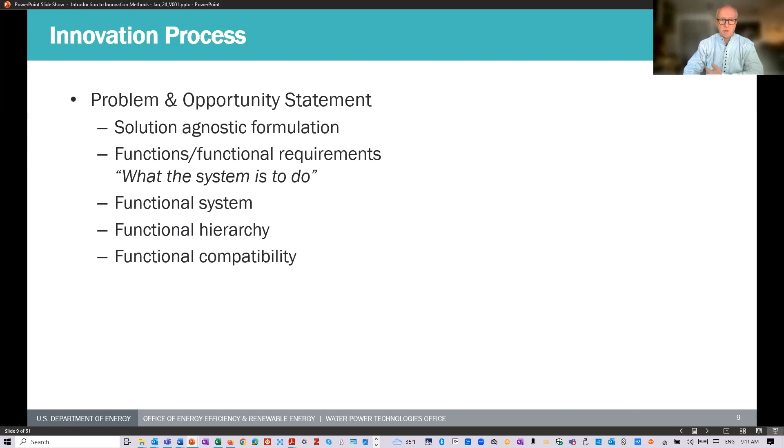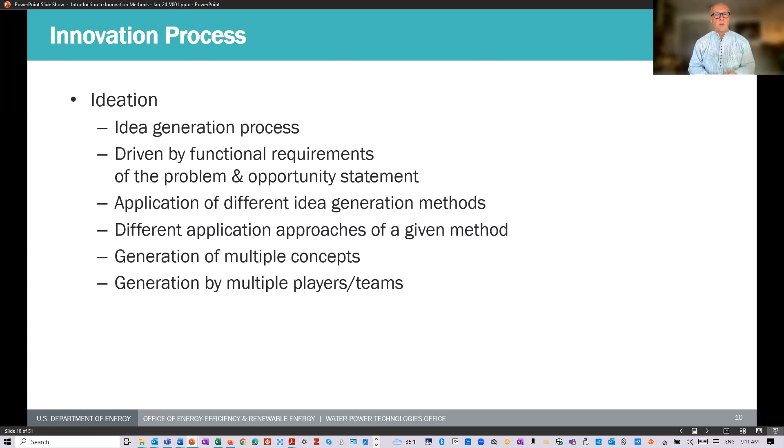Ideation. We want to have the ideation driven by the problem statement in forms of functional requirements. We want to generate more than one idea, have them compete against each other, and iterate through them.

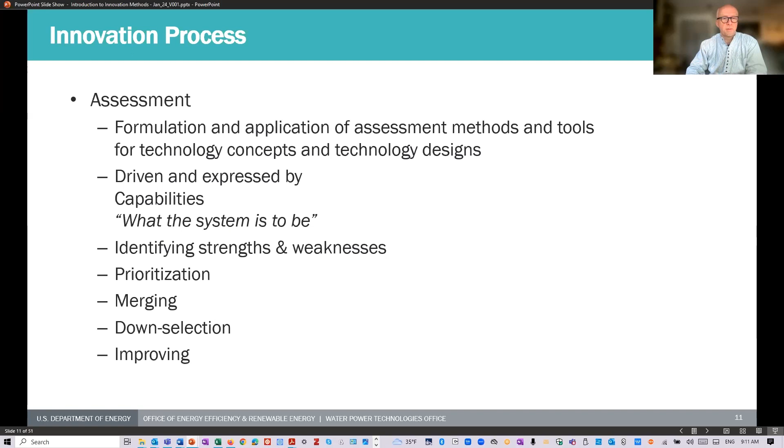In terms of assessment, if we want to iterate and have ideas compete, we need to understand how good they are. This is where we've developed, for our purposes, the TPL assessment, and you have separate webinars on that. We want to identify strengths and weaknesses, and as a consequence, we might prioritize or down-select certain concepts in our own technology development process in general—again, not prize-wise.

Then the development itself is a process in which we strive to improve the quality of a technology, but also to mature it. It's an iteration across different concepts. Okay, just that as a high level.

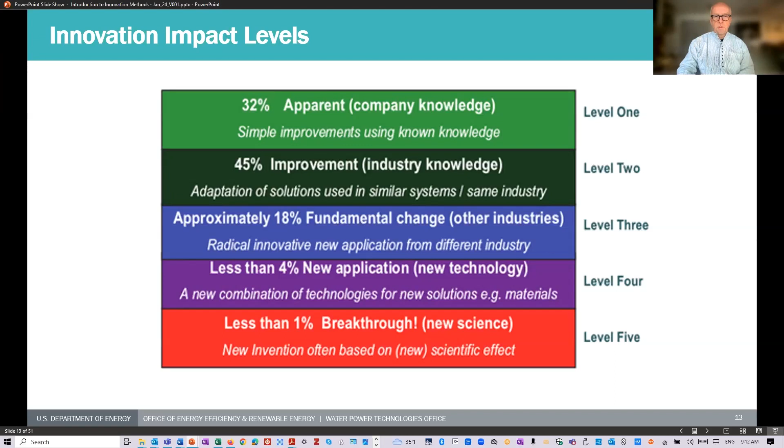So let's go to TRIZ, this technique for inventive problem solving. A bit of background history—you may remember some of this.

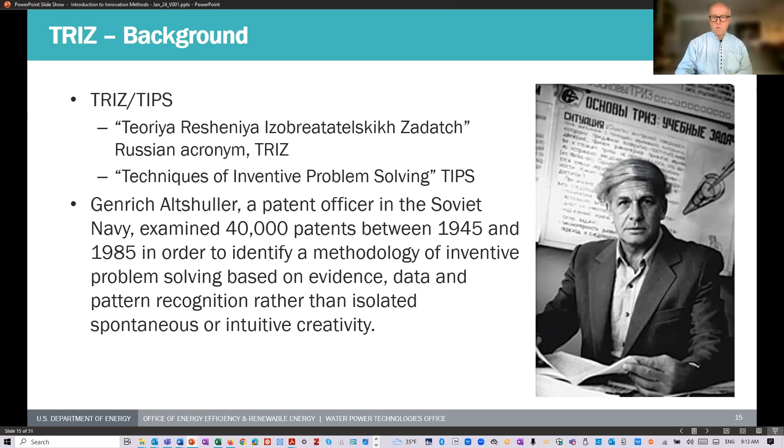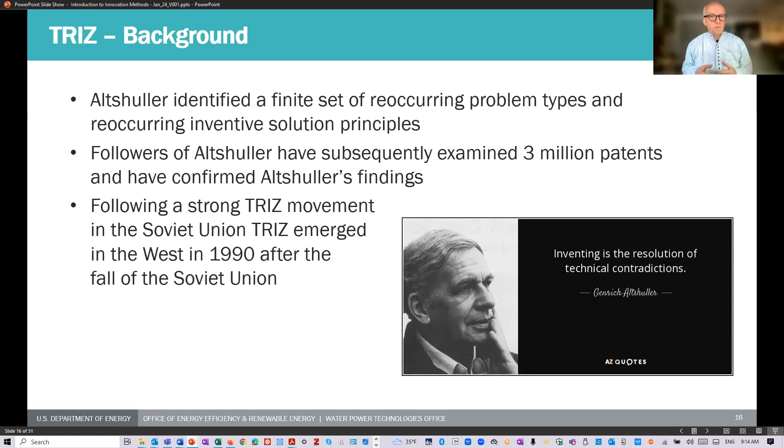He went through a large number of patents, as mentioned previously, and identified the problems encountered in these patents and innovations as contradictions—always solving a contradiction. He identified a finite set of recurring problem types and a finite set of recurring inventive principles. The beautiful thing is that when you go through a lot of innovations and patents and match these, you can say: if I have a certain problem, I know from experience that a certain inventive principle, and with that a certain way of thinking, might be useful and has been useful before—though it's only kicking you in a certain thought direction.

So what he found is a finite number of problems, what he refers to as root contradictions.

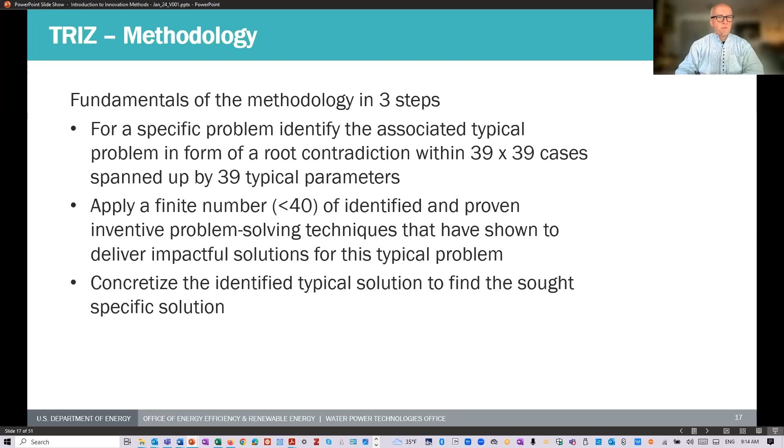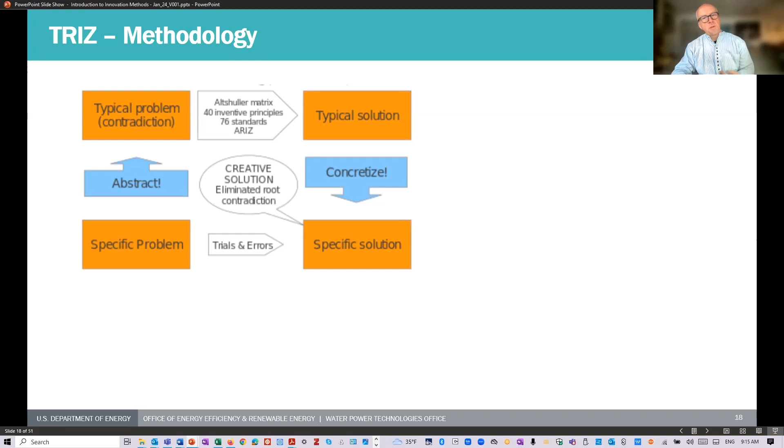These problem categories are a little bit more general. So if you encounter your specific problem of the application you're looking at, you need to translate that into the more generalized problem or the typical problem, find a solution through TRIZ, or find a way of thinking within TRIZ, possibly find a solution and then translate that back to your special situation.

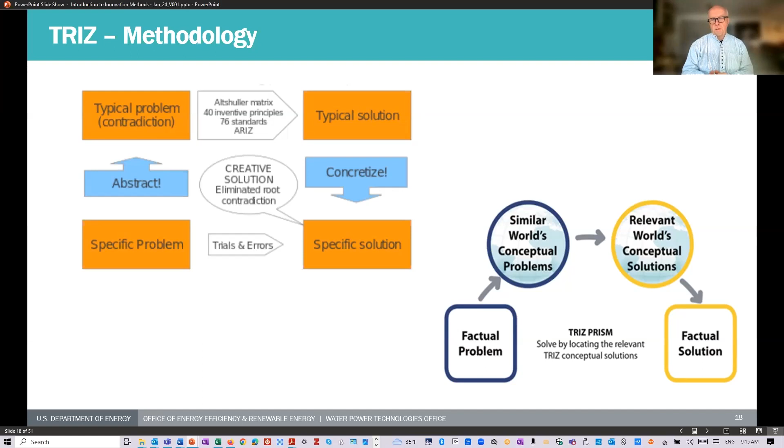On the right-hand side, it's the same thought process, just presented slightly differently. Now how do we have access to these contradictions?

The contradictions are expressed within two parameters. There's different ways on how this has been done. And if you can find the right case within TRIZ, it points you towards inventive principles.

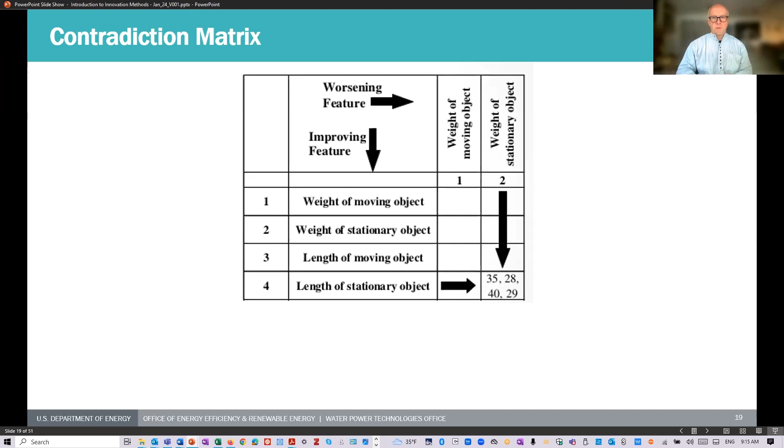These are number coded, like you see in the box on the bottom right. In this case, those numbers stand for those inventive principles. We'll go a little bit further into some examples of these.

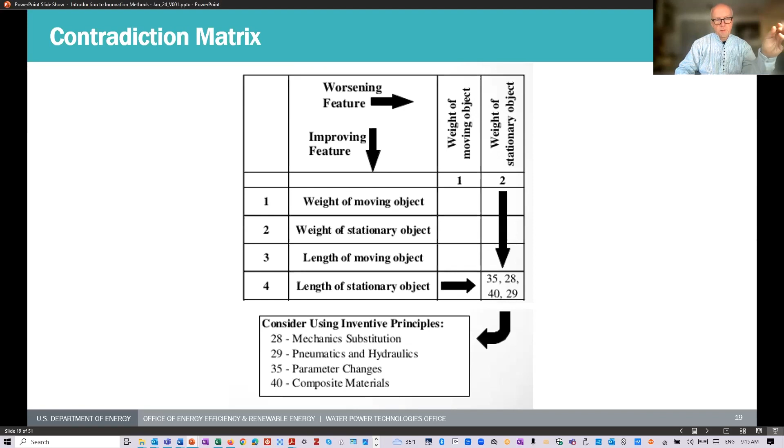Many of these principles are not novel. They are known principles. The trick about it is the allocation from problem to inventive principle. And there's lots of them.

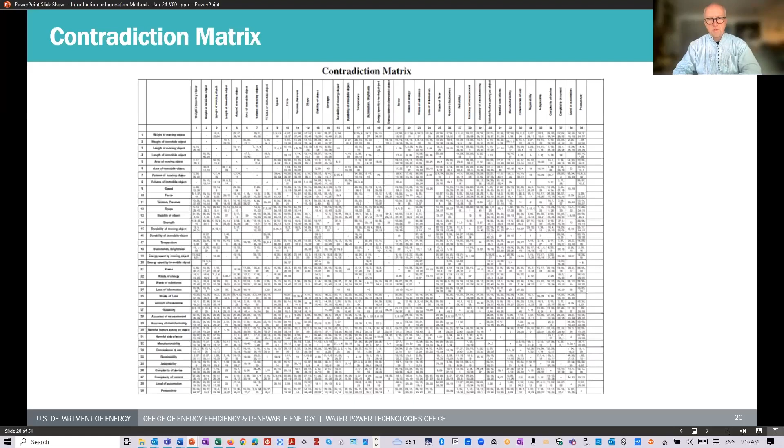So the whole matrix of contradictions is this kind of size and points towards inventive principles. So a lot of work has gone into that. That's where you can see the reflection of these unbelievably large numbers of patents that support this.

Looking in dynamics, many of these are expressed very much in a design engineering world. However, they can be taken at a more abstract level and can be transferred to completely different physics, and it can even be transferred to organizational processes.

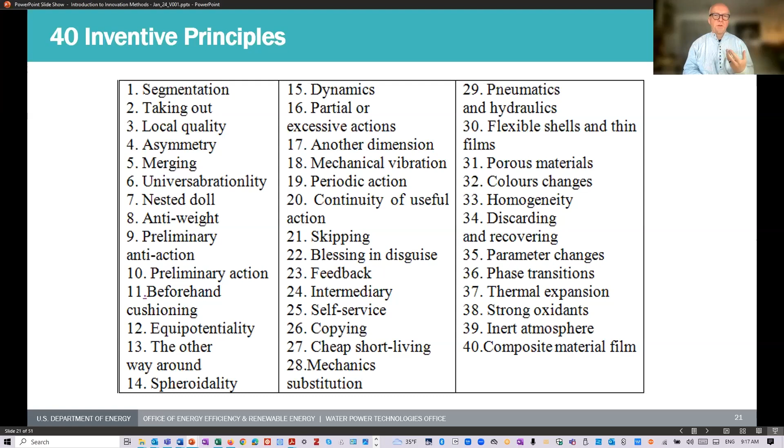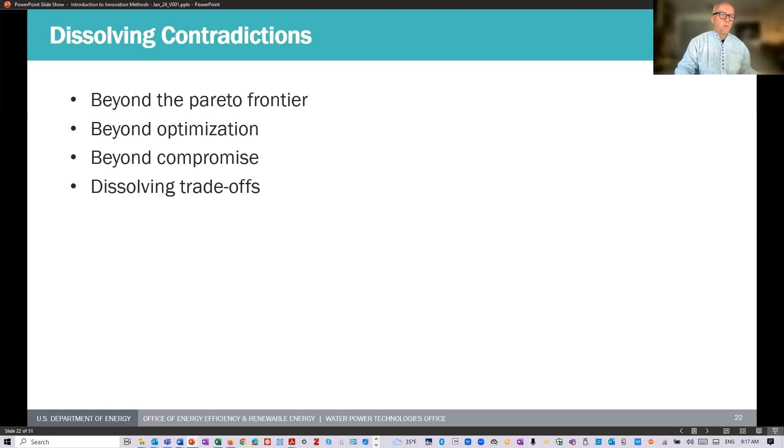When we want to solve contradictions, we do not want to just make compromises. We want to truly dissolve them. We want to get rid of the constraint of a compromise.

What is a compromise? A compromise is typically a combination, or ideally the best combination, of two criteria which are in a certain contradiction, and the one criterion doesn't allow the other criterion to be at its best.

And you may know the term Pareto frontiers. So these are parameter lines that show the best result for parameter B given parameter A is a certain value.

So this line of compromise, you'll find these maybe even in multi-parametric situations when you do a multi-parametric system optimization and scan through the optimal settings with numbers of degrees of freedom within that.

So we want to really break those, to solve those. So we come into areas that are below this, where everything looks good. Of course, that's ideal, maybe ideal thinking, but why not?

Ideality is also a principle of TRIZ, to say I don't start from what I have. I start from the ideal solution and reduce this ideation, this ideality, with requirements of the reality and see where I come out there.

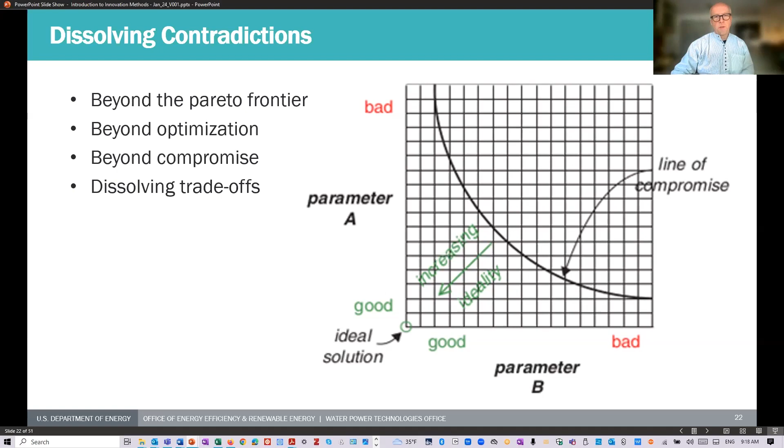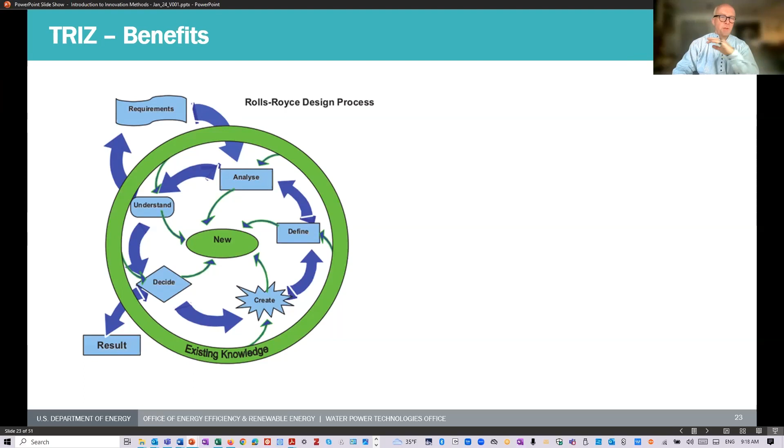Benefits are—and many large companies have used this method. Years ago, Rolls-Royce made it a requirement that every engineer in the company needed to be an expert in this method. And there are many other examples.

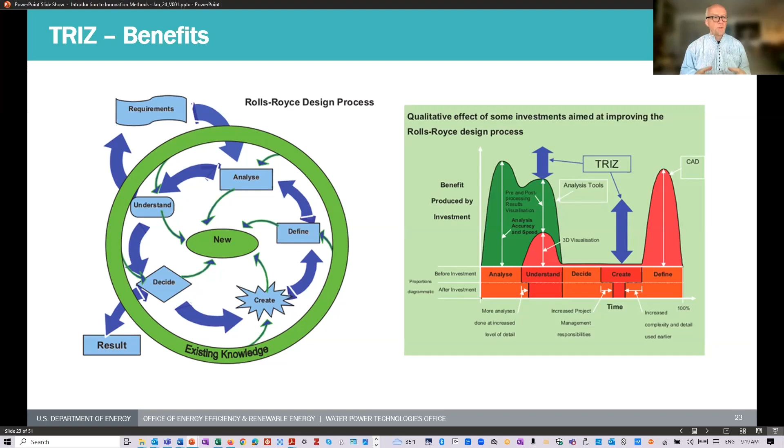So, reasons to use it: it's systematic, it's auditable, repeatable, it's based on proven successful patents. These successful patterns try to embrace a lot of knowledge of innovative thinking. And I mentioned the ideality.

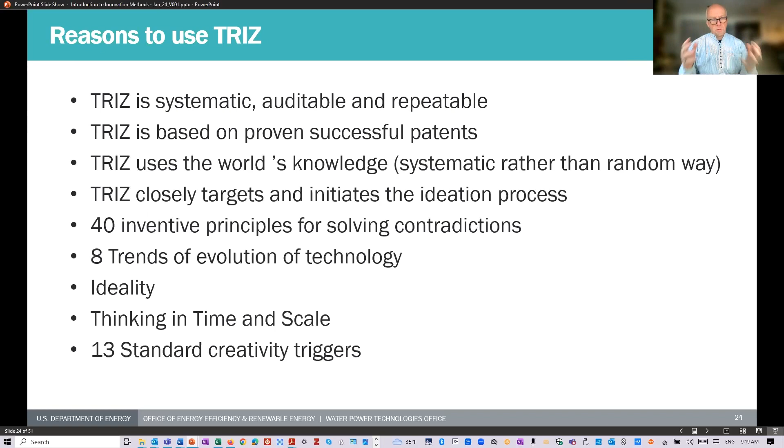So there's other methods and adjacent tools within the overarching theme of TRIZ, and some are mentioned down there.

Okay, let's look at wave energy. In wave energy technology development framework, as presented before, we tried to move around the map of innovation with respect to maturity, technology readiness levels, quality, how good the technology performance levels are, and move around this map. And it's very critical, as seen before, in the TPL process.

Apologies, my phone is telling me a certain time. Don't need that.

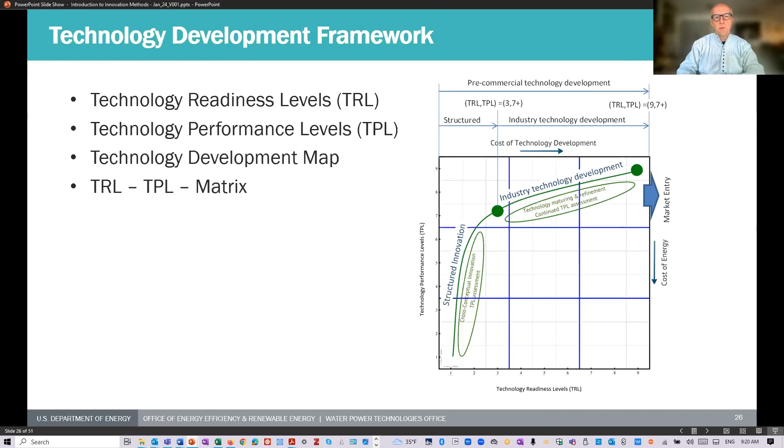We want to move around effectively and efficiently in this technology development process. That means we need to expose what we have to assessment all the time, like mentioned in the innovation process, and we may need to resolve contradictions, improve what we have, or even come up with new things for systems or subsystems. This is expressed with these generic technology development trajectories, which have been investigated with respect to their cost, time, and risk.

The red path is unfortunately the path that is often pursued, driving things to high technology readiness levels while delaying the improvement of a technology. Unfortunately, due to the high cost and time, and predominantly due to the much higher risk of this path, it occurs quite often that technologies do not succeed to market entry.

They may end up in a cost dilemma at high TRL, where fundamental conceptual improvements cannot be implemented because we're too mature to do this. The green path is much more efficient, faster, less costly, and particularly much less in terms of risk, which you can see in the orders of magnitude shown in the bottom line.

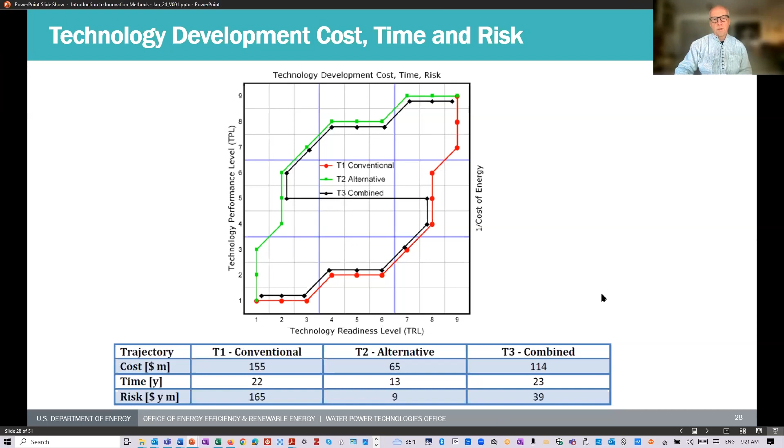Now, we've had very good success with applying this method. That's why we want to promote it and share it. And that's maybe the main thing I want to say here.

One piece of evidence that it is impactful is that when we applied it to a certain archetype of wave energy and identified some of the downsides expressed as contradictions, and applied the methodology, the innovation was so strong that it even jumped not just into a new version within the archetype, but into a different archetype. So from having a multiple body system, applying TRIZ, we came to oscillating water columns. Of course, they exist and have been around for ages in nature and in engineering, but it just shows the capability of the method to truly jump into a different domain of solutions.

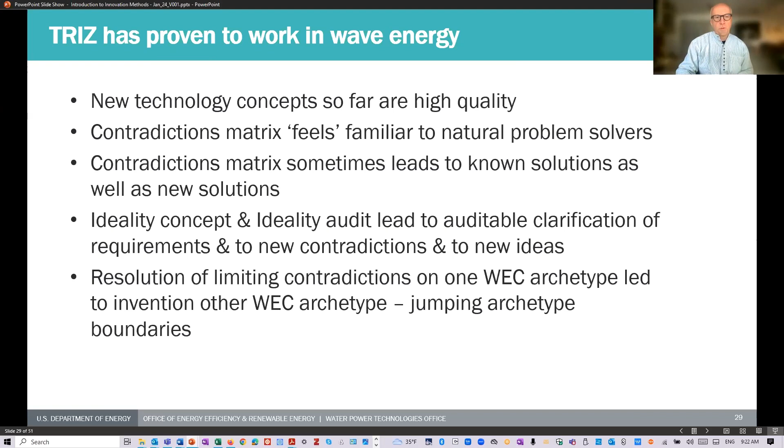We can apply this to different levels of the system: farm level, unit level, subsystem, component, and even the operational process. And InDEEP, of course, covers the different levels that the InDEEP Prize is concerned with. But I just want to mention again, it's not a requirement—it's maybe something you find useful in the process and progress of the prize.

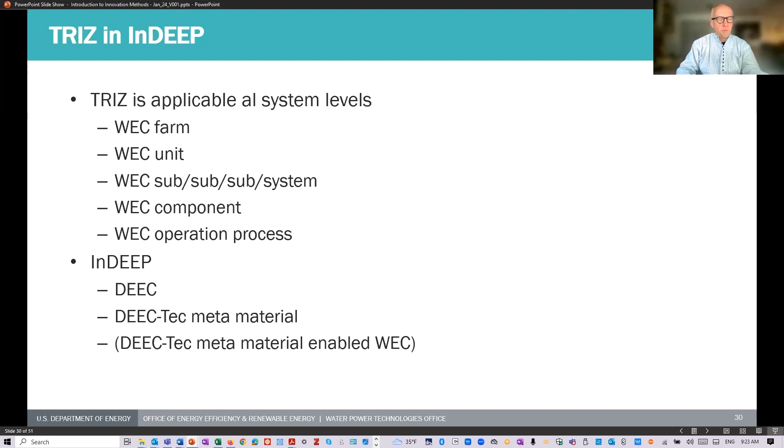Now, with all this in mind, I want to show you an example, a prominent example in wave energy, of how TRIZ can be applied usefully. I apologize, my camera seems to have gone off. I'm here. Okay, all right, let's look at this example.

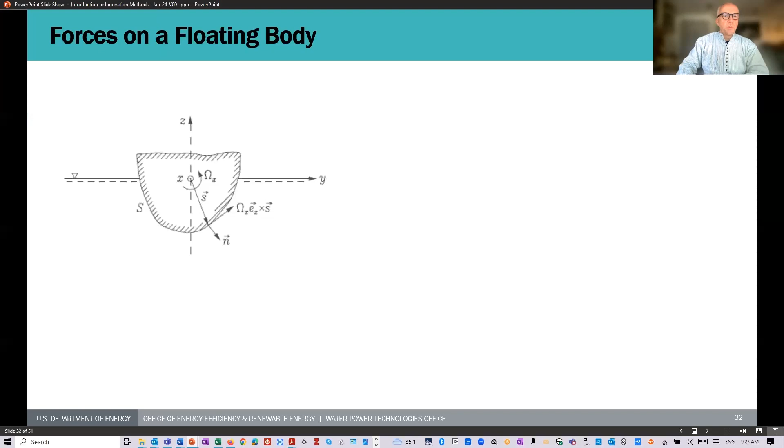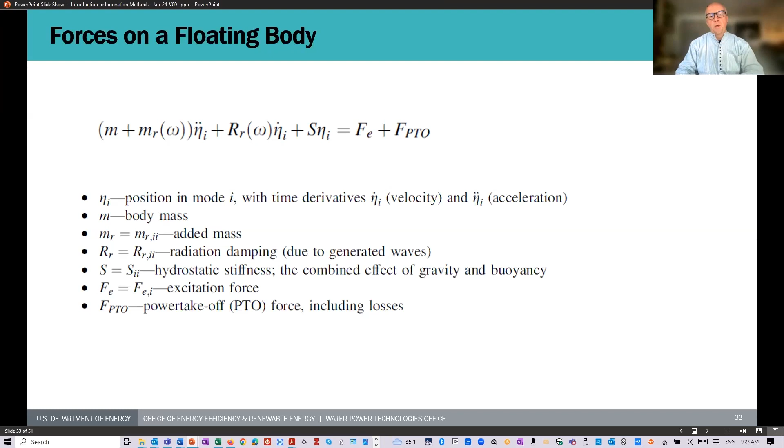I want to make a connection to the general wave energy introduction webinar we had, I believe, two weeks ago, and use some of the slides and bring them into this context. So we talked about forces on a floating body, individual body or multiple bodies, and we looked at the governing equations. The governing equation I want to present here again in its most simple case is a normal oscillating system, one degree of freedom, with inertia, damping, and restoring terms, driven by excitation terms on the right-hand side. So this is all clear.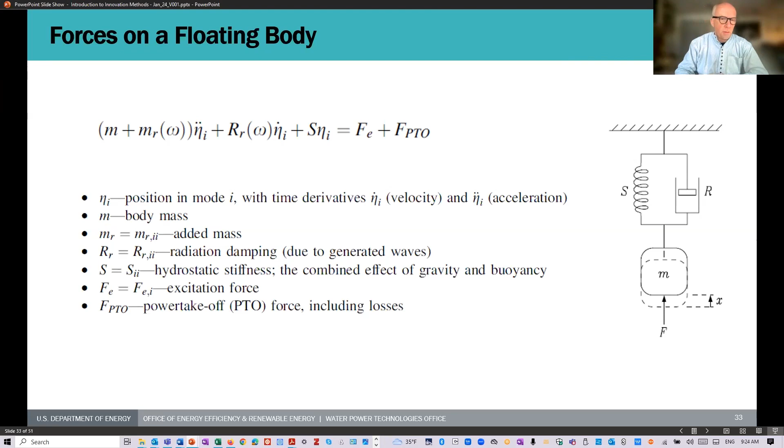We identify that in its simplest form of modeling and understanding, this is a mass-spring-damper system, as we often refer to it. We know how these systems behave.

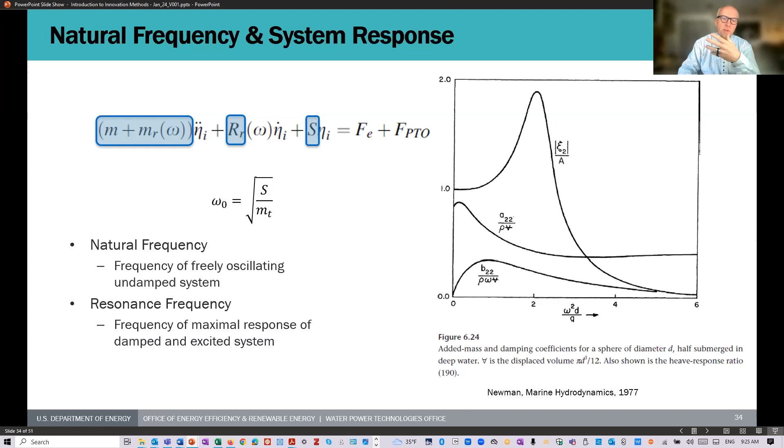Now, these systems, of course, have natural frequencies that are driven by the inertia and by the restoring force. I want to make it really clear that resonance and natural frequency are two different things. The natural frequency is the frequency of the freely oscillating, undamped system. And typically very close to it, we have the resonance frequency, which is the frequency of maximum response of the damped and excited system. So they're slightly different due to the damping that's present. And if it wasn't damped, we would have an unrealistic result in terms of the amplitude.

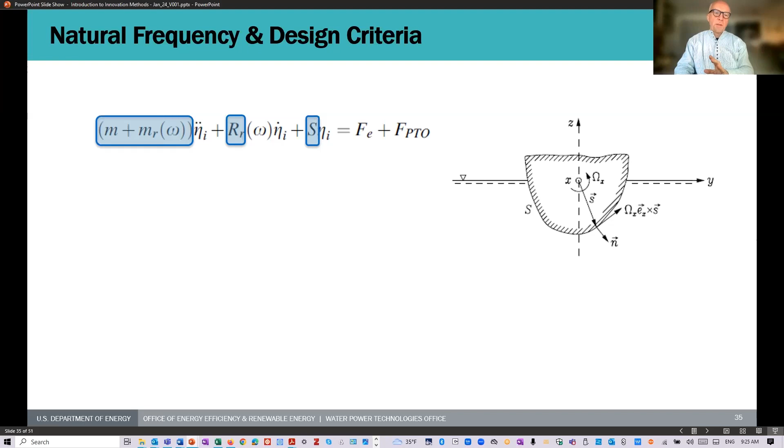Going back to this shape, knowing this now, what is important for the system response—we can look back at the shape and consider that the natural frequency is driven by the mass of this body on the right.

It's driven by the stiffness to which it responds for displacement. And we are talking about heave here, so it's going up and down. The other degrees of freedom are not considered here.

It's driven because of the mass, by its volume. We've got buoyancy at play here. It's a freely floating body. And its shape, particularly with respect to the surface piercing area, because the surface piercing area of the body defines how strongly it resists and restores to vertical displacement.

Okay, then in terms of the excited response, again we have the mass, we have the stiffness, we have the volume. However, we also have an excitation of the system because it's now the excited response. And for this excitation, we have a very important influence of the shape of the system, but this time not just the surface piercing area. This time it's the entire shape, because this entire shape is going to diffract the waves.

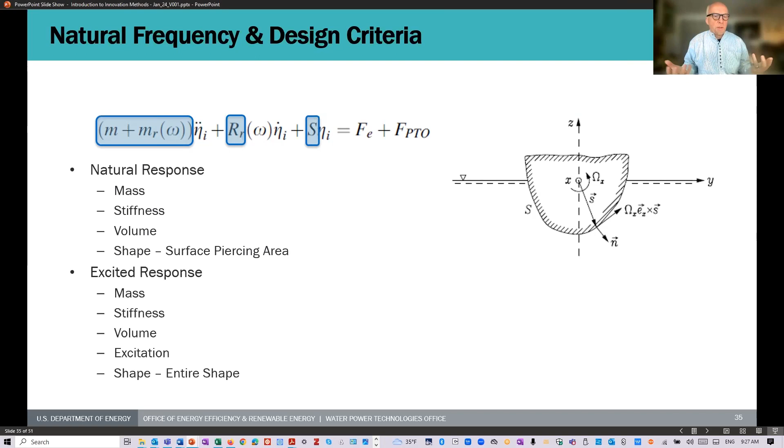And it is going to take the surface pressures out of this diffracted wave field and integrate them up to an excitation force, excitation moments as well.

So what does that mean in order to get this response on the right-hand side and influence it? Unfortunately, for a simple floating body at certain sizes that are meaningful for techno-economic success for wave energy conversion, these resonance frequencies are unfortunately at too high frequency values.

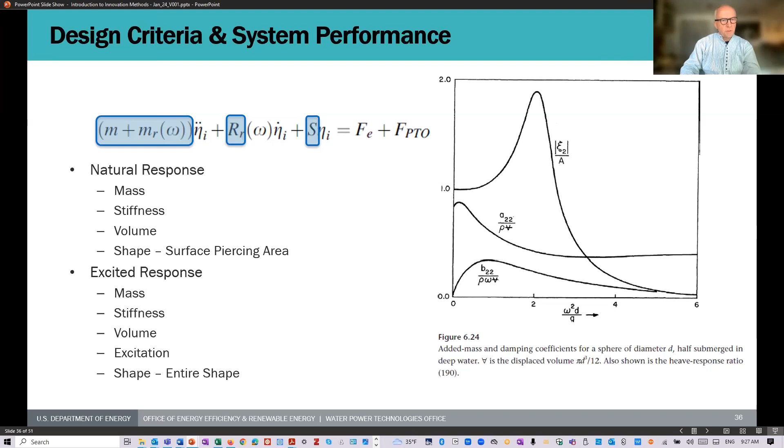So the system would like to respond at a high frequency, but the waves are at a much lower frequency. So we need to make design decisions that bring the natural behavior of the heaving buoy into the region of the waves. And we just looked at key design aspects in terms of mass, volume, and shape.

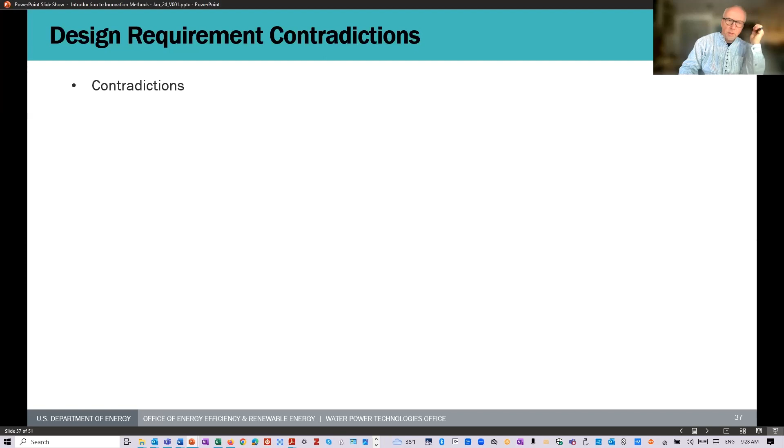Okay, let's go on. So we have, unfortunately, a lot of contradictions if we want to achieve the influence of the natural frequency and the response. And this is quite a lot, and we can't go through all of them, but I want to emphasize a few. So we just saw, simply from the formula,

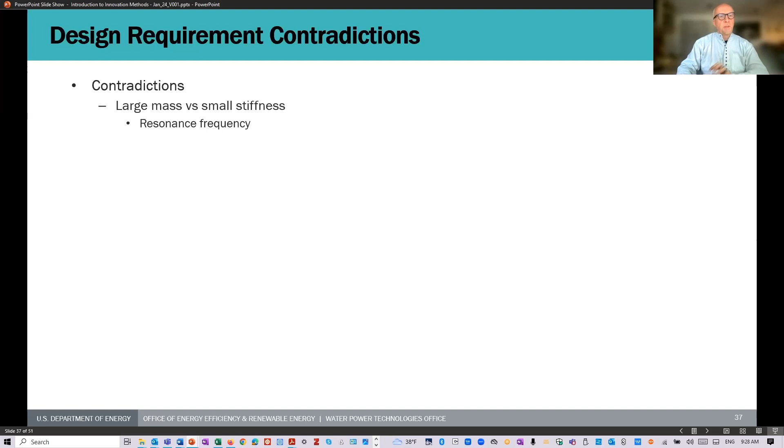we have large mass and small stiffness is what we want for the resonance frequency. That doesn't come naturally together, because if I have a big body, I might have a big surface piercing area.

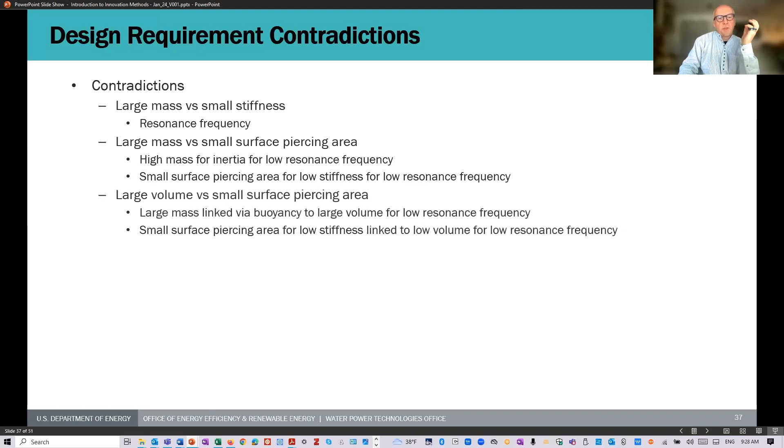That's emphasized here a bit more precisely. Then we have things like large volume versus small surface piercing area. The large mass is through the buoyancy connected to the volume. That'll bring for a low resonance frequency. And the surface area, piercing area, is linked to the stiffness, but also implies that maybe I need a small volume for that to get to a low resonance frequency again.

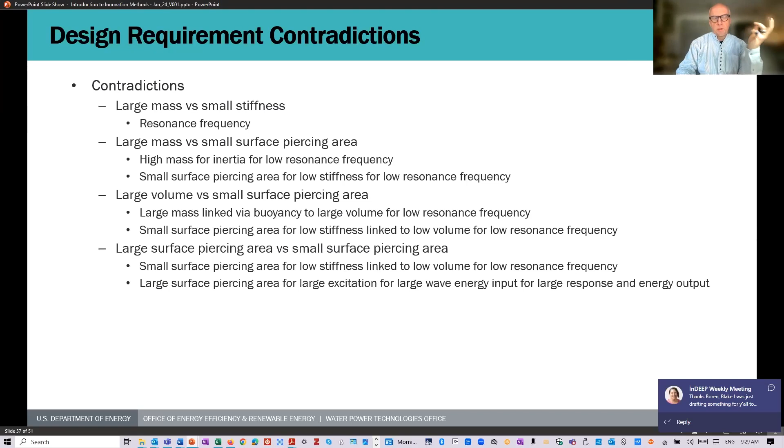Then we have things like large surface piercing area versus small surface piercing area. So for large surface area piercing area, I want a large excitation, so it's likely that I have a big surface, and for the resonance to be in the right place, I want to have low stiffness.

And it goes on. So in terms of excitation, I want to be close to the waves, and I want to maybe have a flat surface that's particularly orthogonal to the upward orientation, because that's the degree of freedom I want to excite. And it should be large for getting as large excitation, to get a lot of energy provided into the system, to get a large response, to get a large output and energy output, energy absorption.

At the same time, I want a small surface piercing area. So these are really in strong contradiction in terms of the shape we're looking for.

And another aspect is also that, for mentioned reasons, I want a large volume, but I also want, for excitation for example, large surface areas, but I also want a low mass, which is very important for an efficient and effective control of the system, which is a much more sophisticated aspect. But you can see, it doesn't come naturally to come up with the right shape for a heaving buoy.

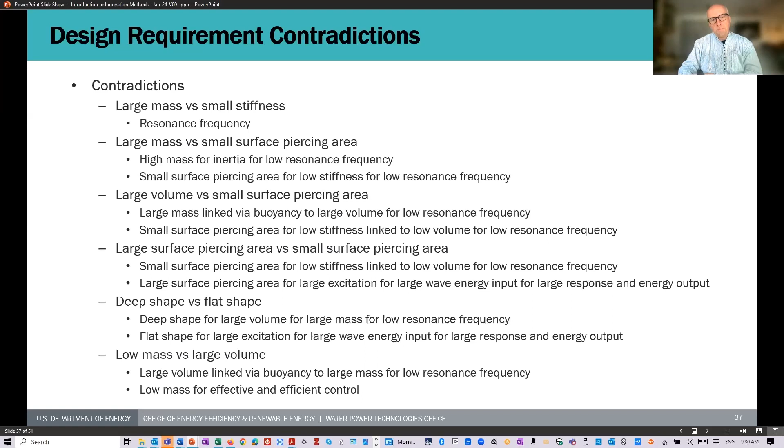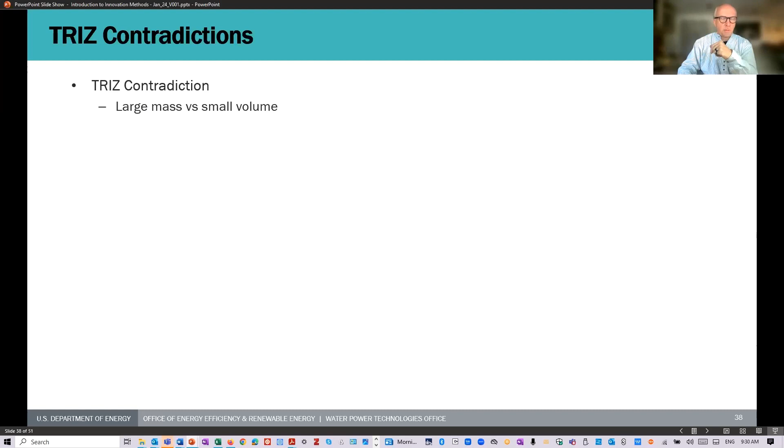So what can we do? Let's take one of these contradictions, this one: large mass versus small volume, which looks like a contradiction, and find an associated contradiction in TRIZ.

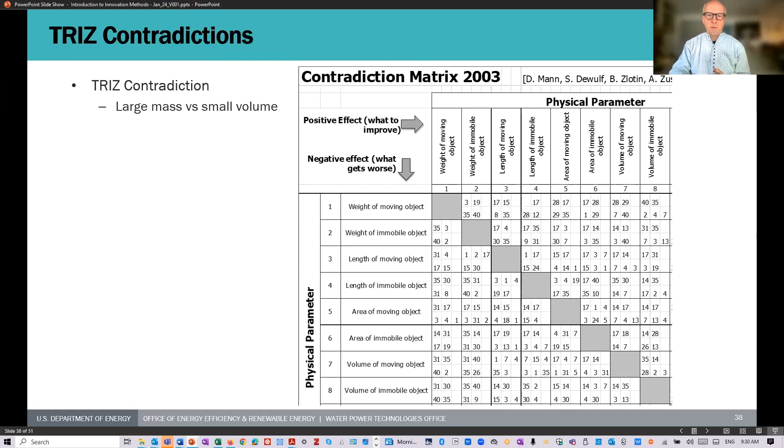Here's a zoom into a part of this huge matrix that I showed you before. It's a different version, but it's the same thing. And if we zoom further into it, we can find a category which has the characteristics of weight of a moving object, and on the other hand, volume of a moving object.

Moving object, because okay, it seems important that we are experiencing inertia. And this TRIZ formulated contradiction points us towards four different inventive principles.

Let's look at the suggested options. One is called nesting—embedding a certain function or design aspect into a different one. A replacement means trying to achieve what I need by different means, and achieving it better that way. Maybe also partial replacement.

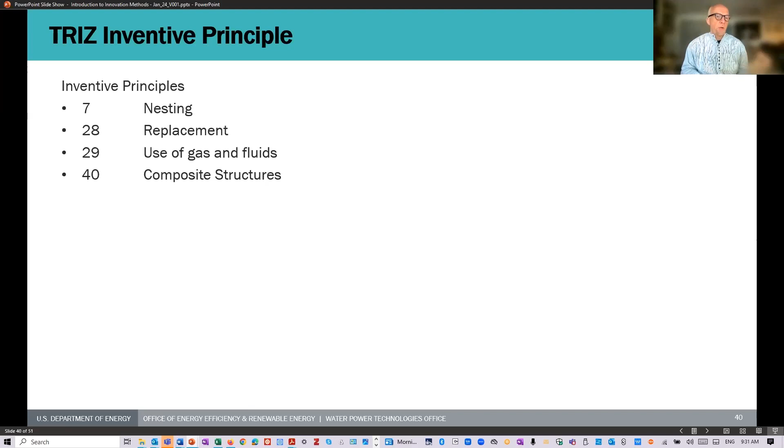Using gas and fluids might be useful for some cases. Composite structures, of course, are often a solution to different problems.

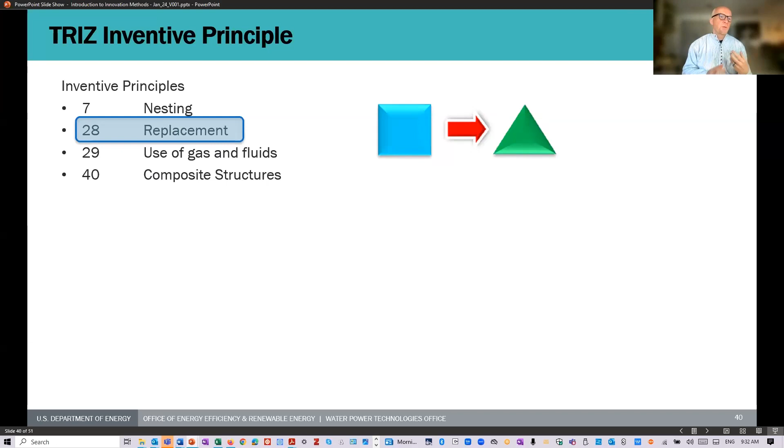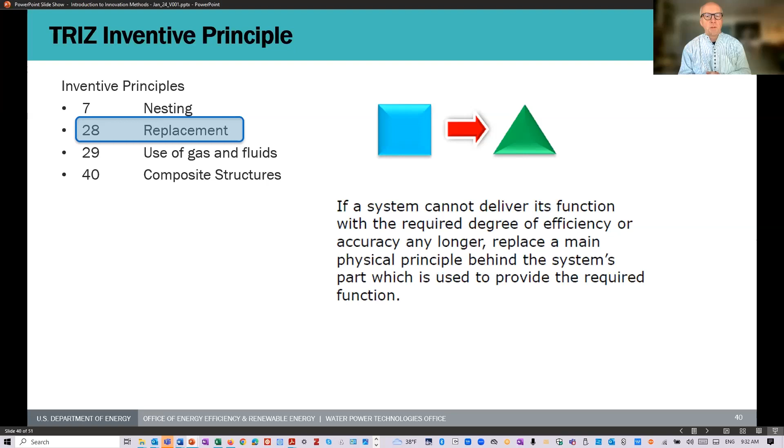The one we want to pick out here is replacement. A symbol for this is simply changing key characteristics of one thing by some other thing. But equally, on the right-hand side there could be a square and a triangle, because I add the triangle and separate the function into two providers of that function. The formulation used here is: if a certain design aspect doesn't deliver the function I want, I may replace it or partially replace it.

Now we go to a very prominent example—probably one of the leading companies at the moment. They just completed a few months of testing in Portugal, in Aguçadoura, apparently with good results for a full-scale system.

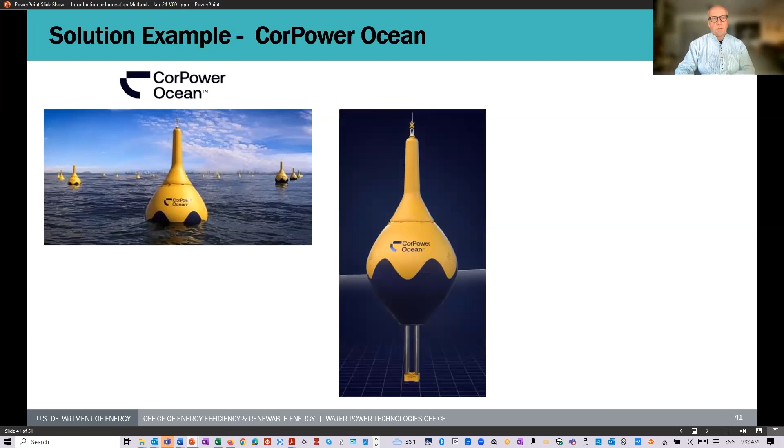That's CorPower. You've seen CorPower previously in the introduction to wave energy, as a heaving point absorber—exactly the system we looked at, with all the challenges we discussed. This is just to introduce what the system looks like: it's a heaving buoy. It can move in surge and other degrees of freedom, but the active power-absorbing degree of freedom it maintains is heave.

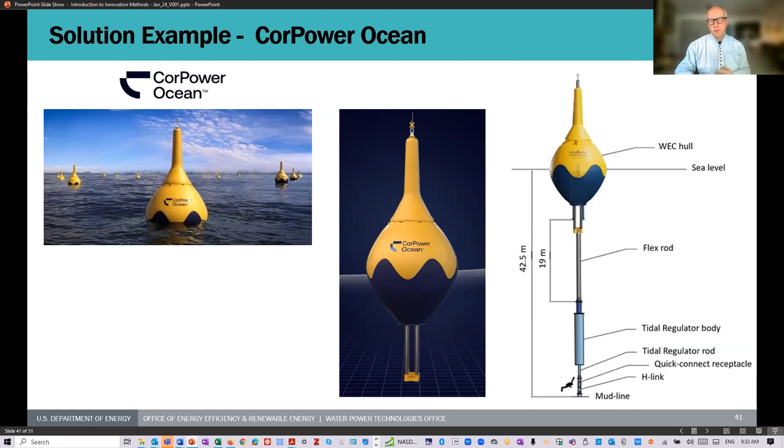The problems in terms of having the right system response are clearly described and understood. With the separation of the restoring coefficient—that was one key aspect—while maintaining the volume, we have hydrostatics. This is exactly what we expressed before: the surface-piercing area gives a restoring force to bring the system back into its initial unexcited equilibrium.

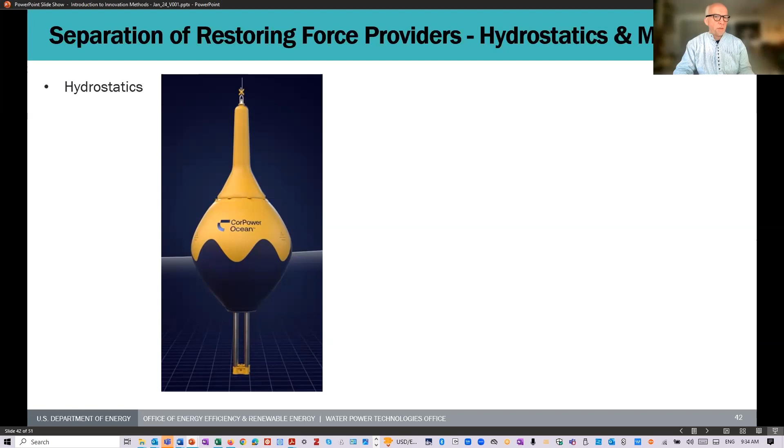So, the heave stiffness: what has been implemented in the system is that another stiffness has been added to influence the overall stiffness of the system. This stiffness, or restoring force—because we want to reduce the overall stiffness from what we already have from hydrostatics—was introduced as a mechanical solution that provides a negative stiffness term.

Now, what does that mean? A negative stiffness term means if I displace a system from its equilibrium by displacement x in a certain direction, it doesn't come back—the further I displace it in that direction, the further it's pushed away. So it's a force proportional to displacement, but instead of leading it back, it leads it away.

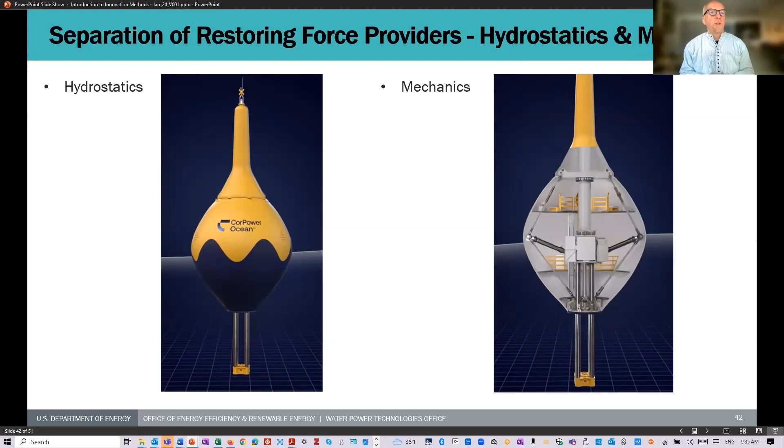If I add this kind of force to the hydrostatic restoring force, I get a superposition of both. If this negative contribution is smaller than the positive contribution, I still have a positive total restoring force—however, it is reduced compared to the original pure hydrostatics.

Now, how is this implemented? Let's look deeper into this design. When the center body is moving, or remains static relative to the heaving buoy that goes up and down, we have these hydraulic rods that can be actuated with a spring component. They are long when there's a large heave displacement, and short in the mean position. If there's positive pressure in them, they want to extend—so given the opportunity to extend with a heave displacement, they will push further out.

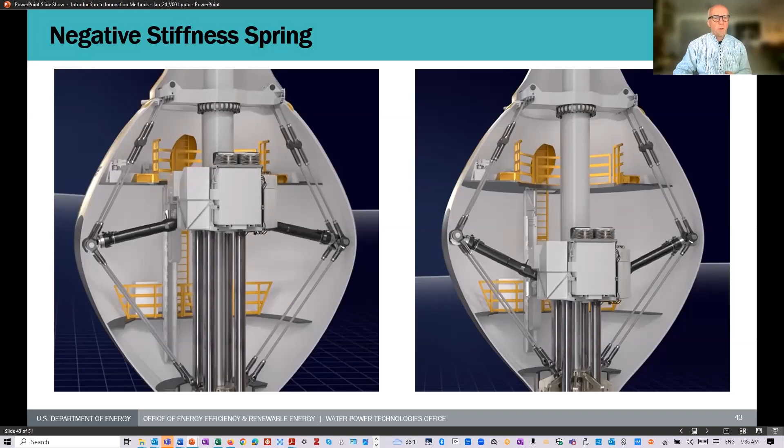So we've added an internal mechanical force that acts like a restoring force. It's negative, it introduces instability. However, the positive restoring force from the hydrostatics are larger, and we get the stiffness to drive the dynamics of the system that we want. Okay, what does that look like?

And another aspect I want to bring in here, we could go the same chain of inventive principle, seeing a contradiction, inventive principle, and what the solution is. From another aspect implemented here, look at the buoy, what we see is that we have a large displacement, there's a lot of volume, and maybe it's possible that the mass inside actually doesn't satisfy the volume displacement and doesn't satisfy buoyancy. And that's actually the case. So the mass in the buoy is significantly lower than the displaced volume in the equilibrium position.

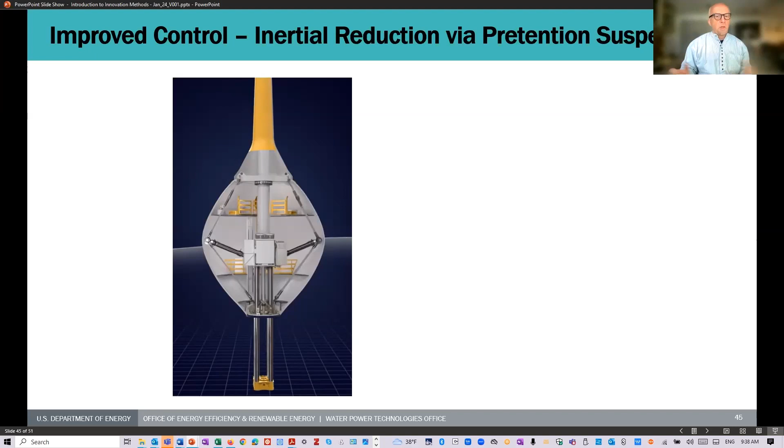Now, how is that achieved? It would have to lift up if that's the case. So what is being done is that the rod and the connection to the seafloor is provided with a pretension. This pretension allows the system to sit deeper in the water than it normally would by buoyancy. What do I achieve with this? I get the surface areas that I want for excitation and radiation, essential for wave energy absorption. But I also get the reduced mass, which I want in order to have an agile, very responsive system for effective control.

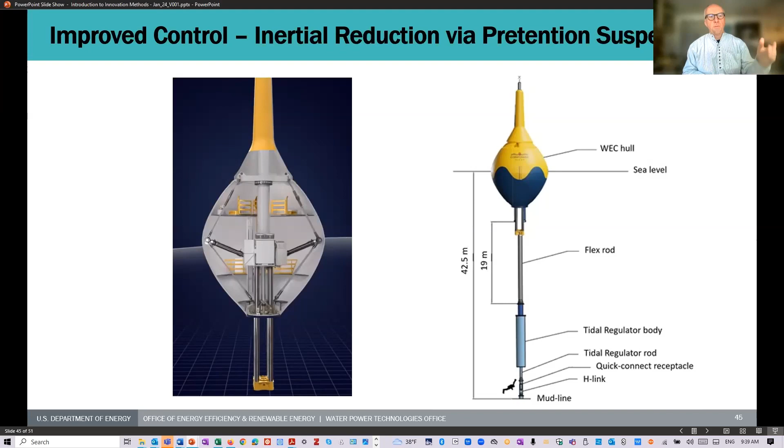And we could have displayed that in the same sequence of thinking as we did with the other one.